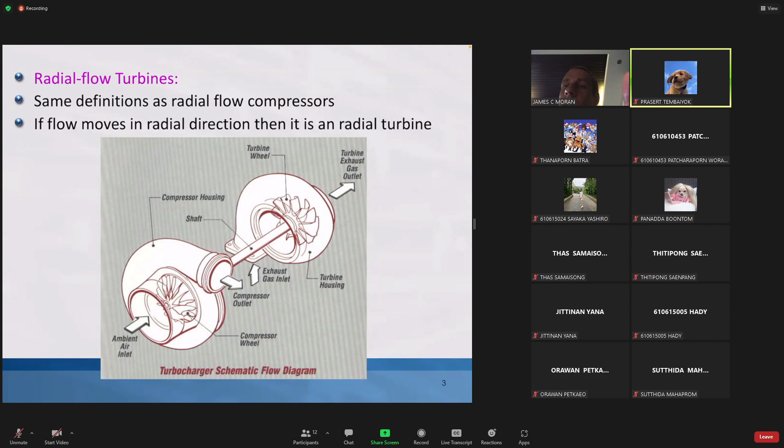There's not just axial turbines, there's also radial turbines where the flow enters in the radial direction and then kind of leaves in the axial direction. So here, this is an example of a radial turbine, a little turbocharger there.

In terms of the velocity of the gases moving through the turbine, we use the same terminology as before. So the velocity of the gas is given the letter V. The axial component is given the letter Ca, and then the relative velocity between the gas and the spinning blade of the turbine is given the letter W, big W. Okay, so the exact same sort of terminology as before.

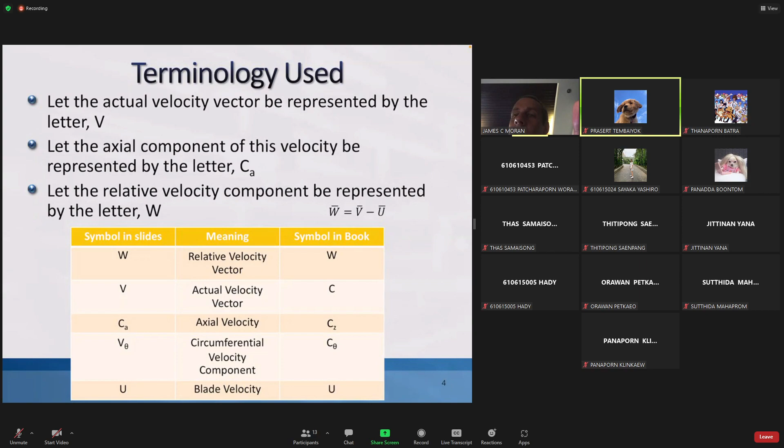There's a few little things that are different in terms of a turbine and a compressor. So one thing is that the stator or stationary nozzle is always located before the rotor.

Okay, so let's have a look why. Well, you could have it here. So here's the combustion chamber. Gases come out. As you say, you cannot let the hot gases just hit the turbine blade if they're not moving. So you have to get them moving. You have to get them moving at a high velocity first.

So you must put it through a nozzle first, a nozzle or a stator, right? You put it through a nozzle or a stator to get them to spin very quickly, or to get a high velocity. Then that high velocity hits the turbine blade, and the kinetic energy is what causes the turbine blade to move.

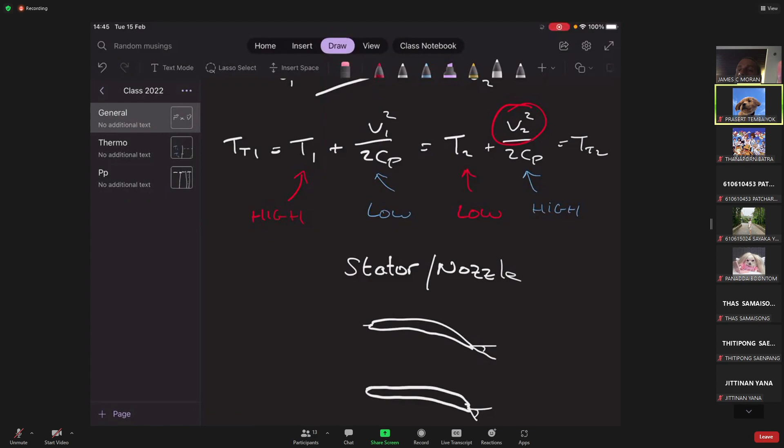Okay, so let's say we have a stator, or a nozzle. Let's just say, and I mean, I know we have spent a lot of time focusing on sort of these angles here, right? The leading edge angle and the trailing edge angle for stators and rotors. But as well as that, especially for a stator, we must also be very cognizant.

The stators, in other words, the area here at the inlet to the stator and the area at the outlet, right? I mean, you kind of want, it's a nozzle, so the area at the inlet is going to be bigger than the area at the outlet. I haven't drawn it terribly good here. They look the same, but in practice, the area must get smaller because you want the velocity to get bigger.

Coming in, you just have the velocity coming out of the combustion chamber. Let's say V1, and then it's accelerated as it moves through this nozzle. Now, here's the thing: it's not accelerated in the axial direction. Right? So this here is the axial direction. Right, you don't make it go faster there because that's not really useful to you. That'll just make it pass through the turbine quickly, but it won't help spin the turbine.

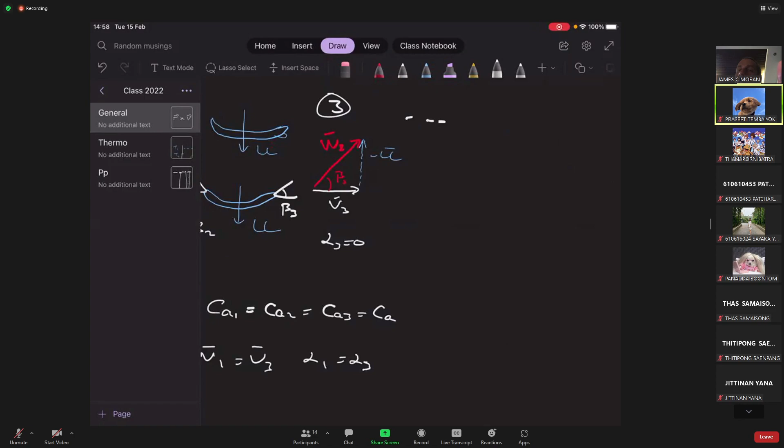I didn't put it in, but in most cases, the velocity out of the combustion chamber is just in a straight line, it usually doesn't have any swirl. If I wanted to make it more general, I could have drawn V1 like this with a component V theta 1, and this is CA, and then at the exit V3 would be the same, but it's okay, it's all good.

So basically, the kind of analysis of a gas turbine is the same as for a compressor. What we're trying to do is look at the total energy drop of the gases. When the gases come in, they have very high energy. Let's say here we have T total 1 at the exit of the combustion chamber, here we have T total 2, and at the exit of the rotor, T total 3.

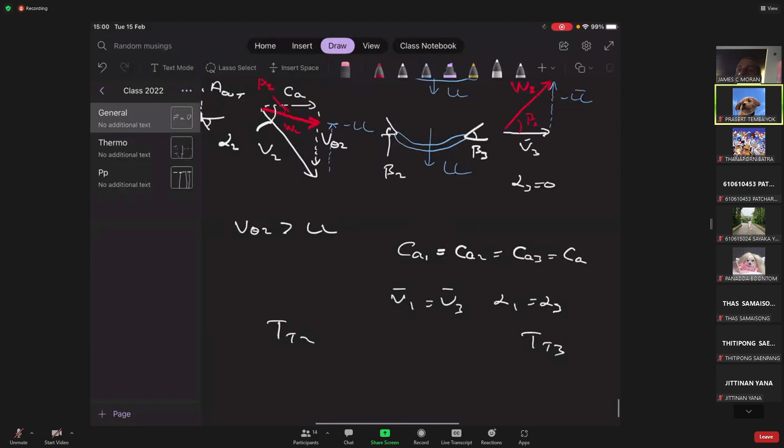What's the relationship between T total 1 and T total 2, the total temperature at the inlet to the nozzle and the total temperature at the exit of the nozzle? They're equal, it's just a nozzle, so total temperature stays the same. And through the rotor, which is bigger, T total 2 or T total 3? T total 2 is bigger because the energy is not the same going in and out.

It's less energy coming out because the gases are giving their energy to the rotor to spin the turbine. All right, so that would be the relationship there. Okay, let's just for a second look, because it'll come in handy later on.

Let's just look at some trigonometry with this velocity diagram at point 2 and point 3, and let's try to match some things up if we can. So taking point 2, the linear blade velocity u is going to equal CA tangent alpha 2 minus CA tangent beta 2. Let's have a little look at that.

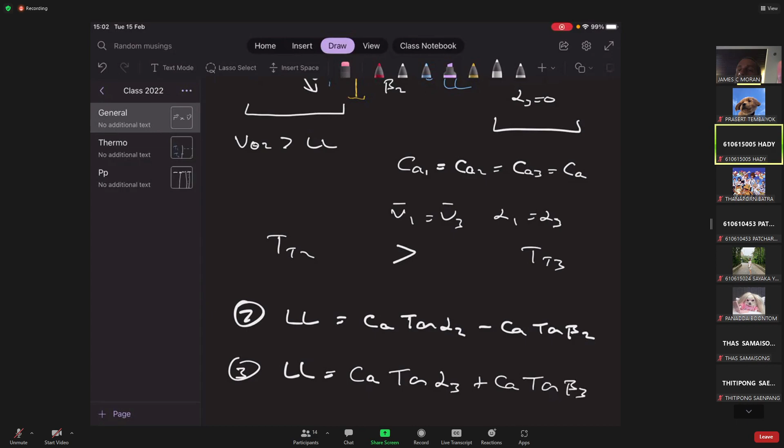And if I look at point 3, I get u is equal to CA tangent of alpha 3 plus CA tangent of beta 3. So if you look here, this here is CA tangent of beta 3, and that is u.

And tangent of alpha 3 in this case is 0, but it doesn't have to be in the general sense. Like in these slides, you see it's not 0. Here I've let the velocity come in with some swirl, so it's spinning a bit as it comes in, just to make it general. Normally alpha 1 is 0, it's just coming in a straight line, but let's generalize things if we can.

So then at the exit, you'll want V3 to be the same as V1, so you'll want V3 to have a swirl component. In that case, CA multiplied by the tangent of alpha 3, well that's just V theta 3, that's that length there.

And CA tangent of beta 3 is that length there. So you add the two together, and you get the magnitude of U. Okay, so that's what that is.

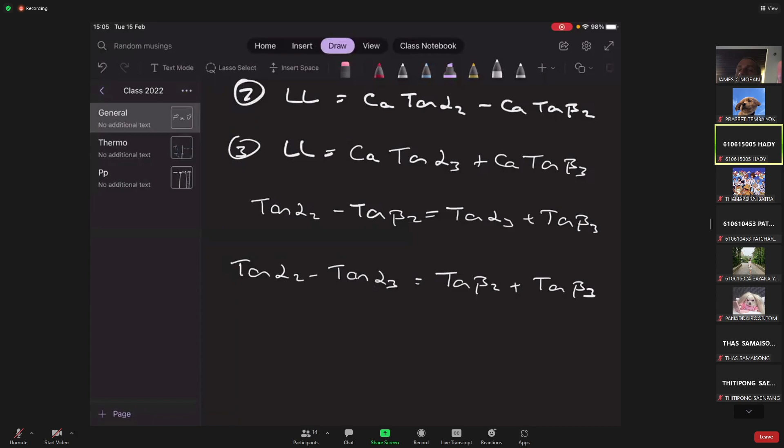So let's look at the work that we get out from the turbine at this little section here, at this radius r. So the mechanical work out, or the turbine work out, is the torque from the fluid, if you will, the torque from the fluid pushing the turbine multiplied by omega. The torque from the fluid is the radius you're at, the change in angular velocity multiplied by omega.

Right, so this is the specific work out, the work out per kilogram of fluid. And we'll use WS here, work out from the stage. So the work out, the specific work out from the stage, is R times the change in angular velocity, so V theta 2 minus R V theta 3. The air has an angular velocity coming in as R V theta 2, a very big one, and when it leaves, it has a small angular velocity, R V theta 3. So that energy has gone into the rotor.

Okay, and omega R is just U, so I could write this as U times V theta 2 minus V theta 3, no problem. I could also do a little bit of trigonometry and write: V theta 2 is CA tangent alpha 2, and V theta 3 is CA tangent alpha 3. So this is equal to U multiplied by CA, and tangent alpha 2 minus tangent alpha 3, which is also equal to tangent of beta 2 plus tangent of beta 3.

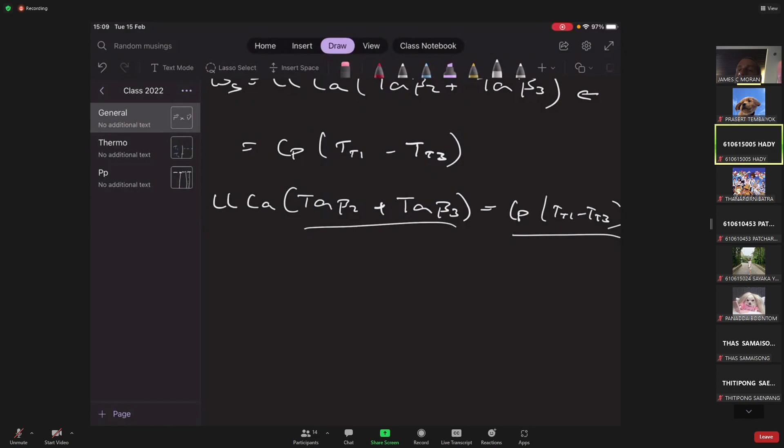All right, so let's see what the slides say. A little bit messy, but saying the same thing. You got an inlet velocity, and the nozzle or the stator gives it a very, very high theta component. It really spins the velocity. The theta component here, V theta 2, is larger than U. And it pushes the turbine so that when it leaves at point 3, it's not spinning as much, because it's sort of given its kinetic energy to the turbine.

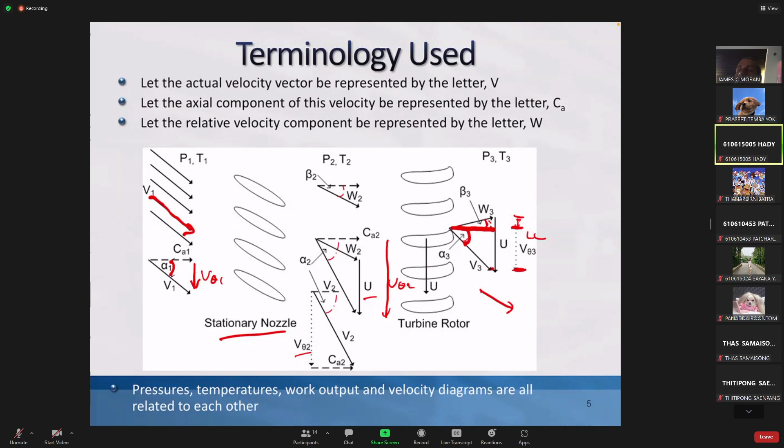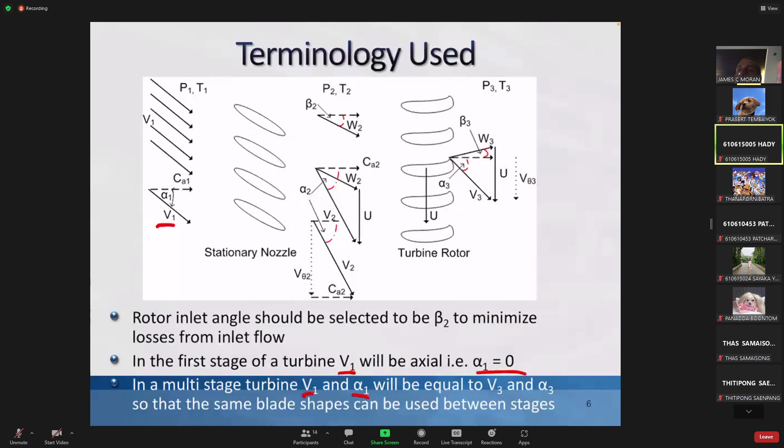So in the first stage, usually V1 is just axial, like it's straight out of the combustion chamber. It's got no reason to spin, I don't think it spins at all, but I just drew it like this to make it general. So in a multi-stage turbine, with more than one stage, V1 and alpha 1 will be equal to V3 and alpha 3. So V1 and V3 are supposed to be the same here. Alpha 3 is sometimes known as the swirl angle.

So U increases with the radius, we know that. So the velocity triangles vary from the tip to the blade. Depending on what radius you take, the velocity triangles will look a little different. So the shape of the turbine blade changes from hub to tip.

Since I've just calculated the specific work per unit mass, we'll simplify things by taking the radius to be the midpoint. Then when we calculate the specific work at the midpoint and multiply by the total mass flow rate over the whole gas turbine, we'll get a close answer to the work output from the whole turbine.

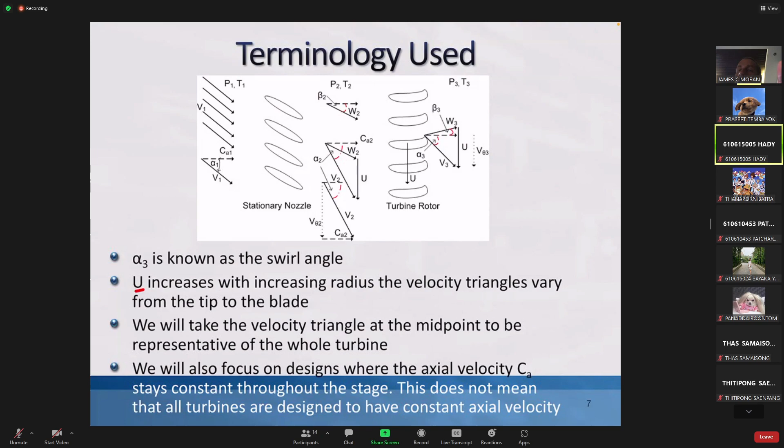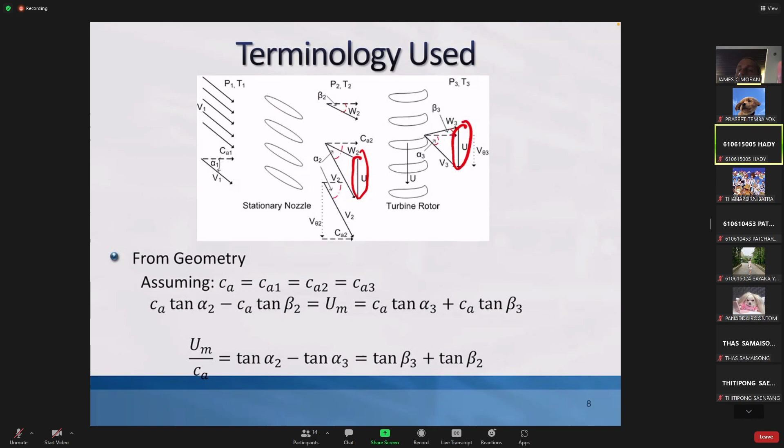In this class, we'll keep the axial velocity CA constant between the stator and the rotor. So the axial component is constant, giving CA tangent alpha 2 minus CA. We already looked at the formulas for velocity U here and there, and putting them together gives you this.

So then the output work, or the output specific work, is T omega divided by the mass flow rate, the change in angular momentum of the fluid, which gives you this, which turns out to be that, which turns out to be that.

So this here is important. It's the work output in terms of the angle of the rotor.

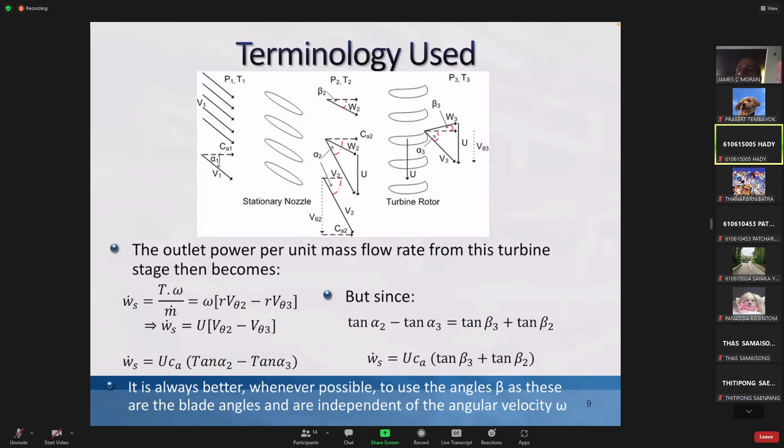For a compressor, we had this kind of limitation that limited the relative velocity at the inlet and outlet of the rotor to being pretty close together, because in a compressor you can't change the relative velocity too much. If you try, the flow will not stick to the walls of the compressor, will not follow the shape of the blade. It will separate—you get flow separation, as it's called.

Flow separation in a turbine is not really a problem because P1 is a very, very high pressure, and P3, well, as you flow out the gas turbine you're flowing into atmosphere, so it's just atmospheric pressure at the other end. So the flow doesn't want to separate and doesn't want to go backwards—the gases in here do not want to go that way.

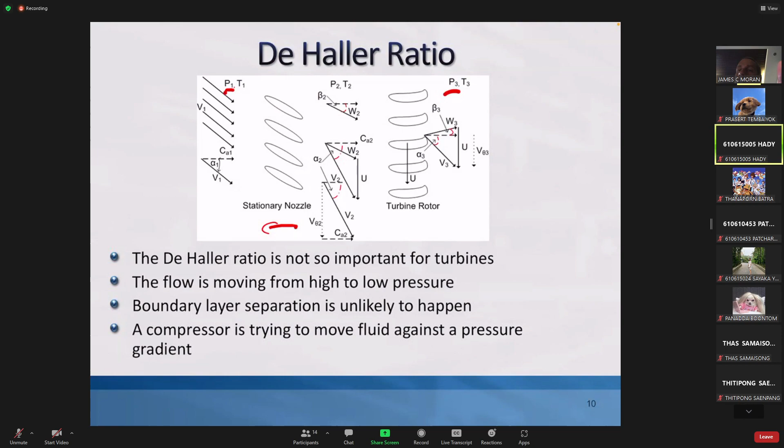So we have two formulas for the specific work output: one based on Newton's second law, and one based on the first law of thermodynamics. So we'll line them up, or make them both equal. Let's bring in the efficiency of the stage real quick, using a T-S diagram.

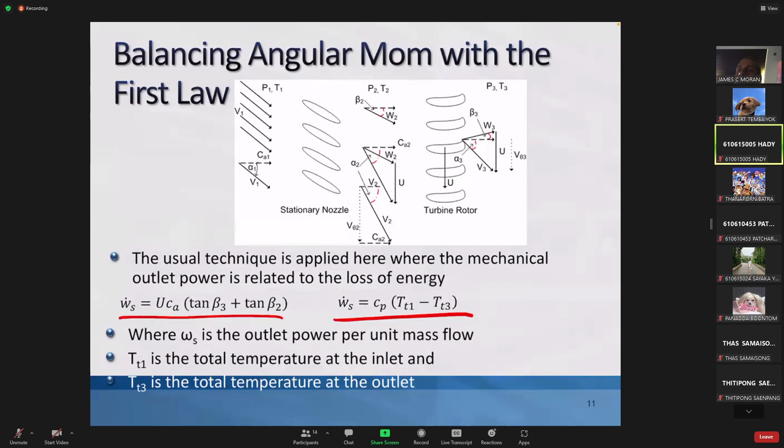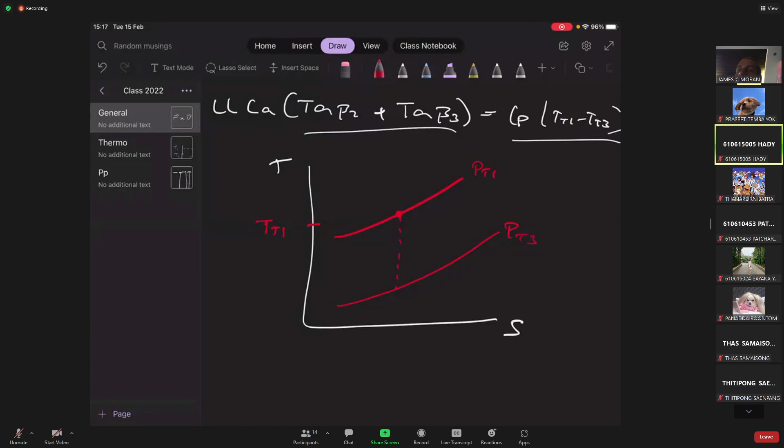This would just be the TS diagram for one stage. Let's say here this is T total 1, the total temperature at the inlet to the stage, and this is P total 1, and this is P total 3—the total pressure at the inlet and the total pressure at the exit of the stage.

If it's an ideal stage, the temperature of the gases will drop down to T total 3 with a little s, meaning constant entropy. Of course that doesn't happen because there's friction in the rotor as the gases rub against it, generating a bit of heat, so you get some entropy generated. In reality, T total 3 will be a little bit hotter than T total 3s, the ideal temperature decrease.

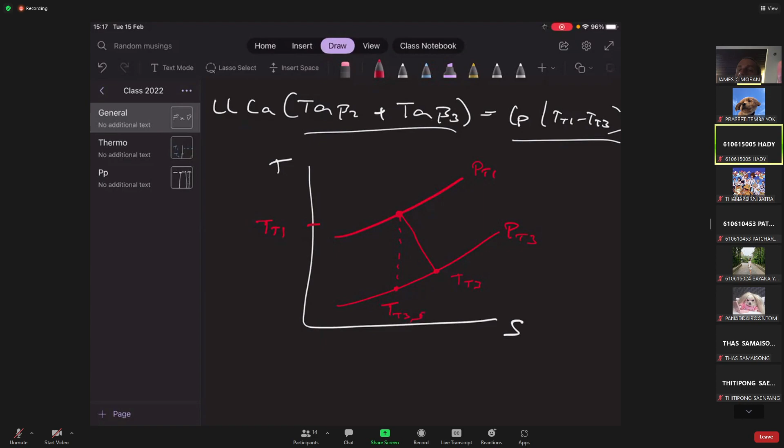So we can define an efficiency for the stage as T total 1 minus T total 3, the actual outlet total temperature, divided by T total 1 minus T total 3 ideal.

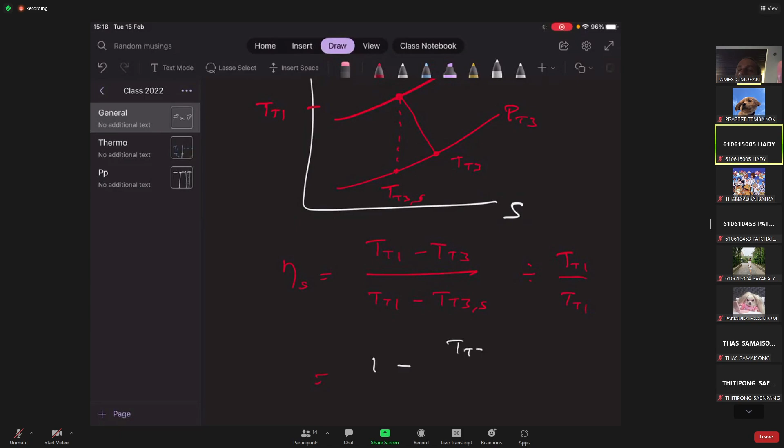Now I can divide above and below the line by T total 1. So this is equal to 1 minus T total 3 divided by T total 1, divided by 1 minus T total 3 ideal divided by T total 1.

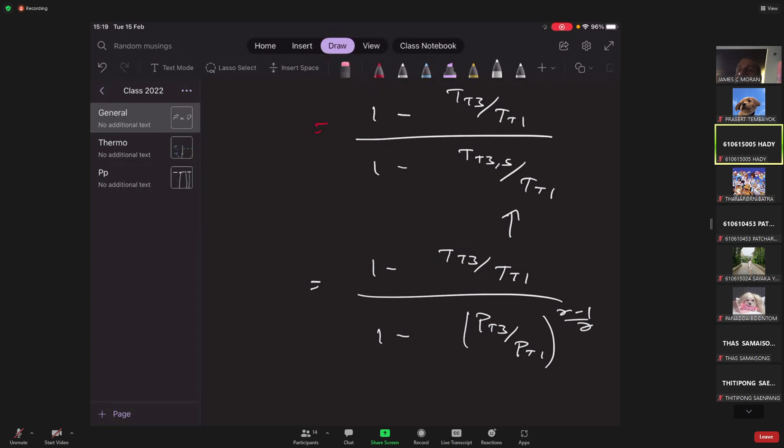Since this is ideal, I can use the isentropic relationships and substitute the pressure ratio for this temperature ratio. So this is equal to 1 minus T total 3 divided by T total 1, divided by 1 minus P total 3 divided by P total 1 to the power of gamma minus 1 over gamma. That's the efficiency of the stage, multiplied by 1 minus P total 3 divided by P total 1 to the power of gamma minus 1 over gamma.

Multiply across by T total 1 equals the change in total temperature across the stage, which is just, if you will, T total 1 minus T total 3, the real value.

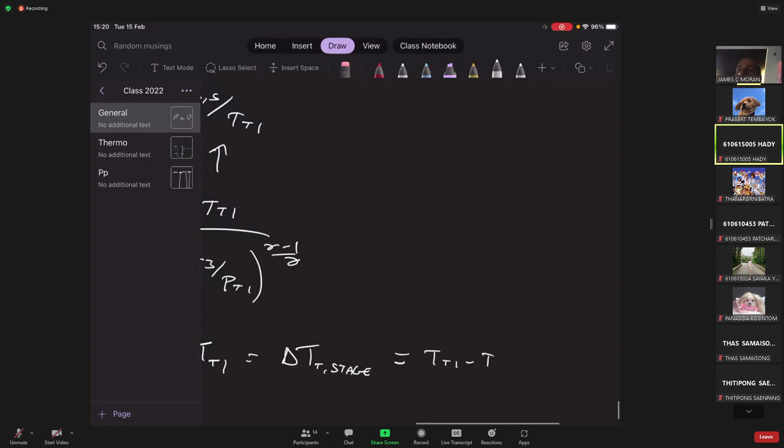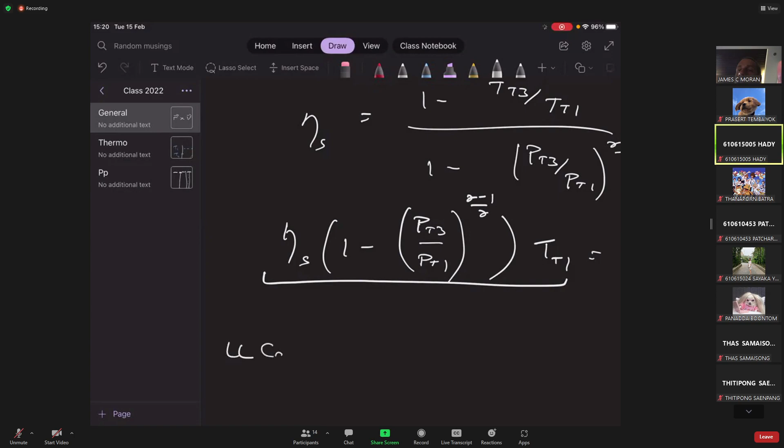All right, so I have this formula here. And I have U CA times tangent of beta 2 plus tangent of beta 3.

So this is the total temperature change across the stage. If I multiply this by CP, I get the total energy change across the stage, which is equal to this. So this is equal to CP delta T total for the stage.

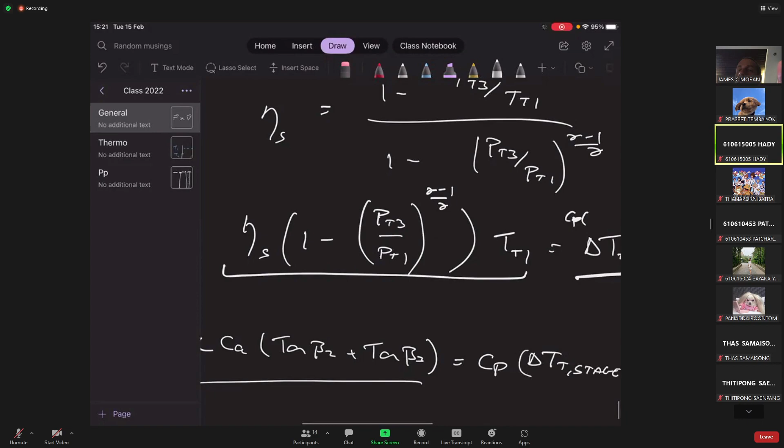So kind of putting it all together, UCA divided by CP times tangent of beta 2 plus tangent of beta 3 equals the efficiency of the stage, times T total 1 minus P total 3 over P total 1 to the power of gamma minus 1 over gamma.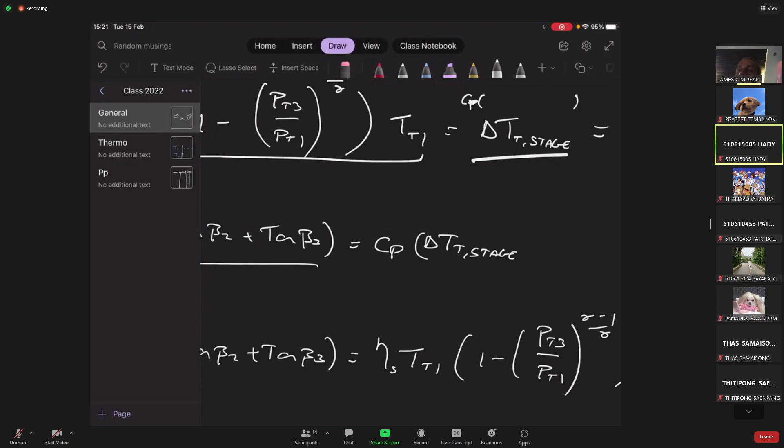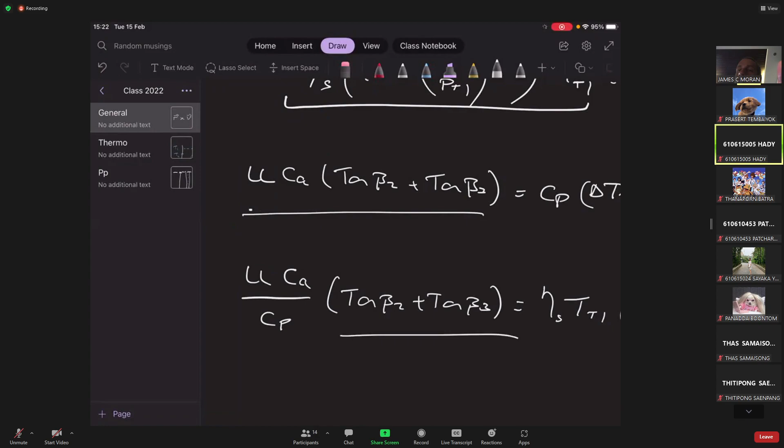All right, so this here is a formula that relates the pressure drop in the turbine with its efficiency and with how fast it's spinning and what shape the blades are. So I think I've done it here, it's just the same thing.

All right, so they're all connected, if you will. The inlet energy, the pressure drop in the turbine, the blade angles, the change in angular momentum and the blade speed and how much work you get out - they're all connected together. You can't change the shape of the blade or the speed of the blade without changing the work output. Stuff like that. Just give me a second there so I put my notes in.

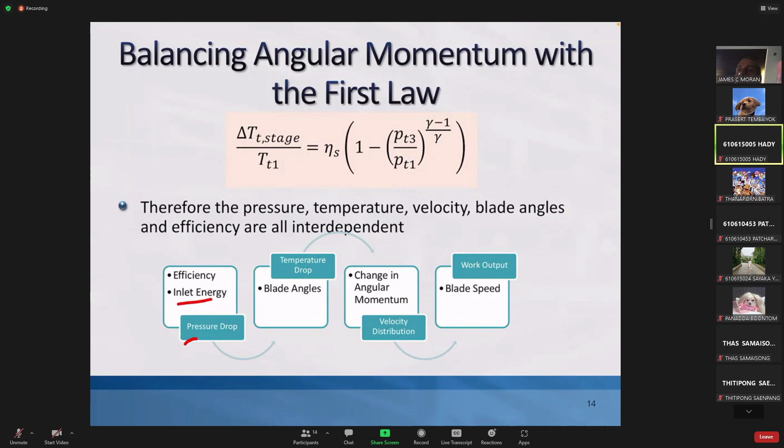Okay, so here's a question that actually I think you would have been able to do after the first 2 or 3 weeks of this course, right? But now you have so much more information that I think you might find it hard to do. But it's one that you would have been able to do at the start, because it's just a nozzle type question.

So it says here, take a flow from a combustion chamber into a stationary turbine nozzle. The total temperature is that, and the Mach flow coming in is 0.55, shown here. The axial velocity remains constant.

So in other words, this velocity there and that velocity there, that component are the same. And the nozzle exit angle is 60 degrees. Calculate the inlet velocity - so what is V1 or CA1? In this case, they're both the same because there's no swirl. The exit Mach number, M2. The nozzle torque per unit mass flow rate if the radius is 0.35 meters.

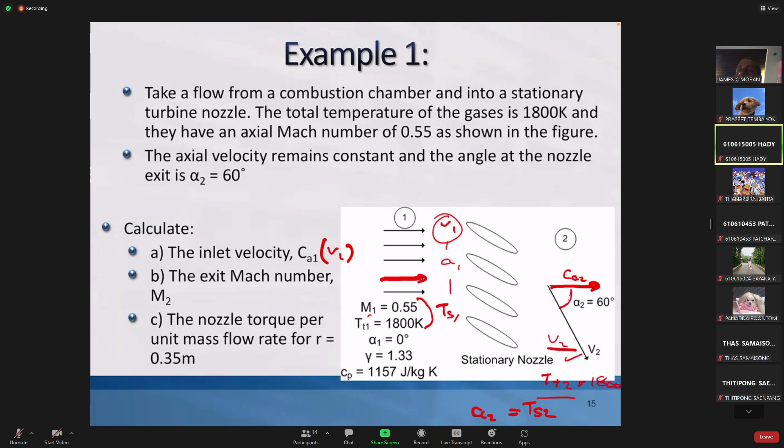All right, so as I said, I think this is all stuff you would have been able to do within the first couple of weeks of this semester. Okay, so to get going, you get the static temperature at point 1. It's 1,714.